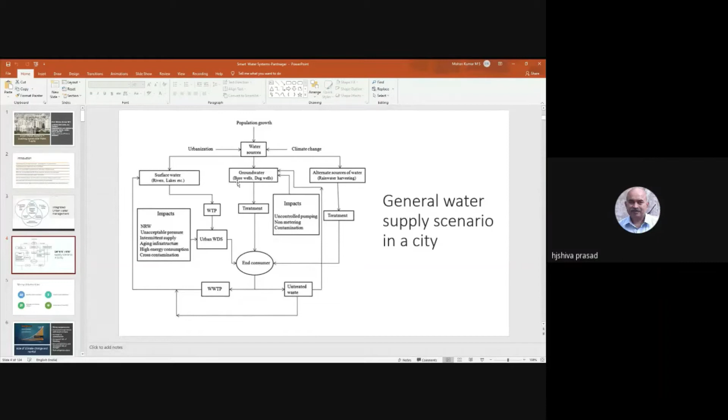So one of the main stresses on water resources, many people would have already talked about it, but I want to emphasize it: urbanization and climate change. We call it a double-edged sword, which is going to hit many of our cities, and all the more the challenges in terms of water resources for the city. These are all general things which we know, but making it happen is the most challenging. You have surface water, you have groundwater, then you have alternate water sources in terms of recycled water, treated water coming into the picture.

Obviously any surface water you need to treat and use. And of course groundwater, we were all taught in the old school of thought that you can just pump it and use it. All that doesn't fit now. You need to treat even groundwater, because in many places it's contaminated, from TDS to even bacteriological contamination. You need to really treat it and send it to end consumers. Other things are how you reduce the NRW, how you reduce the intermittent supply hours, how you address the aging infrastructure. This gives you a snapshot of what really happens to water supply in a city.

So basically we call it messy urbanization in our Indian context. Rural to urban migration is very large. Now we are hovering around 30 to 35 to 40% urbanization. It is expected to touch 50% in coming years. Imagine how we are going to handle it. Many of you are young engineers, researchers, scientists interested in water issues in all aspects.

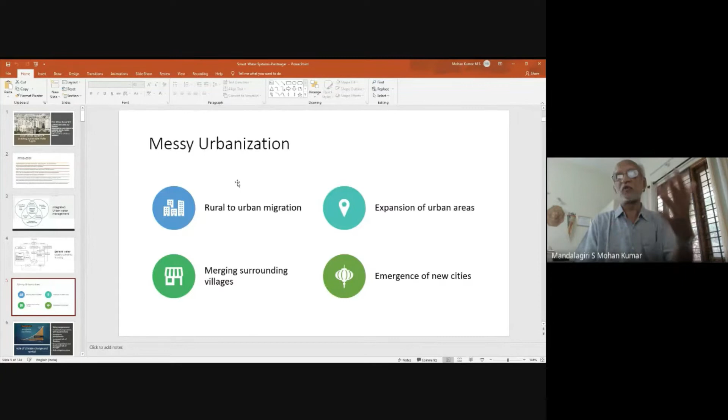Rural to urban migration becomes a very, very important thing. And of course, there is a very rapid expansion of urban areas. The planners, they draw it on the map. As a water resources engineer, your job is the most difficult one, to supply water in all aspects. And of course, one of the things is merging surrounding villages. These are all connected. And of course, there is emergence of new cities. It's an easy one to do. For example, it's always easy to plan a new city than to retrofit an old one.

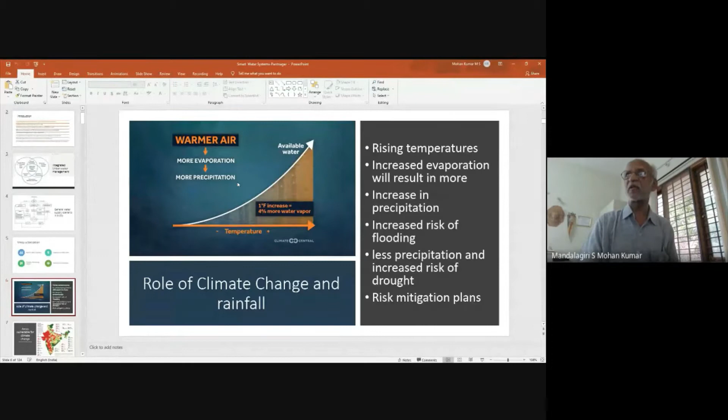I think many of my own colleagues and experts would have talked about it, but climate change plays a dominant role in all these things, and we need to really get ready. There's very, very clear evidence that the temperatures are rising. With the rise in temperature, automatically your storm bursts or rainfall bursts are increasing. You have heavy intensity rainfall in a short duration, which is going to come and go. And in such a scenario, how you are going to handle water systems is a very, very challenging one.

And of course, with that, it also brings in the contaminants as it moves along. It could be agricultural contaminants, it could be industrial contaminants, and all these things will end up in the rivers and the water bodies we are going to use for cities. Keeping that in mind, how are you going to take care of it is the question, and how a very good balance between surface water and groundwater needs to be maintained.

Whenever we talk about water security, now with remote sensing available, you have not only the current maps, even some of the old maps are available. Many river courses may be shrinking. Then the water availability may be reducing, or the other way around, water may be moving very fast, and unless you store it, it's already gone to the sea or wherever.

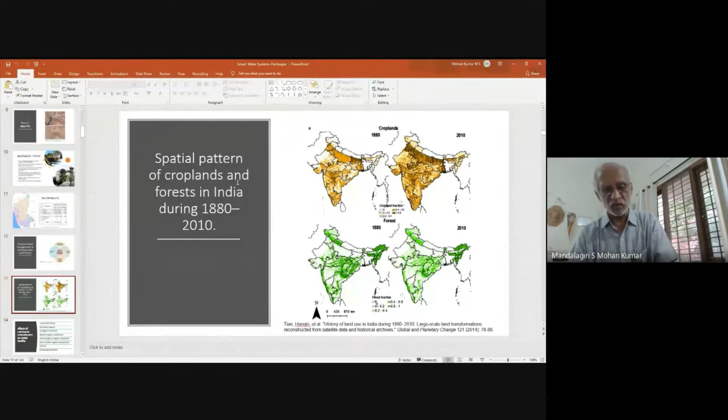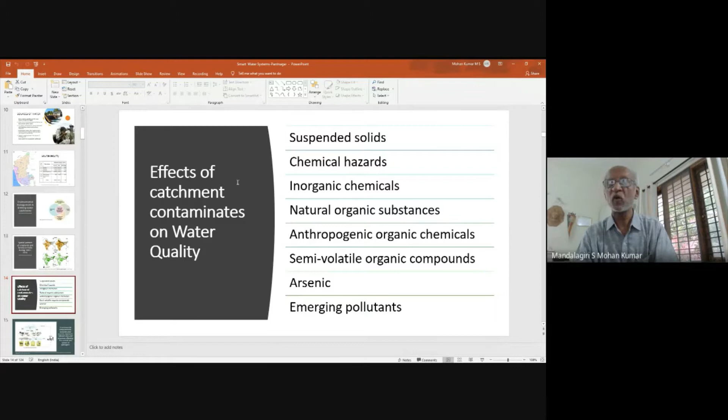You can see obviously land use, land cover, and land use pattern play a dominant role in our water system. It's changed completely, because you have to grow food for a very large population. At the same time, if you change a lot, it's going to affect your surface water and groundwater yields. So catchment contaminants affect water quality in terms of suspended solids, chemical hazards, inorganic chemicals, natural organic substances, anthropogenic organic chemicals, semi-volatile organic compounds, arsenic, emerging pollutants in terms of personal care products and PPC, microplastics, etc.

All these things indicate that continuous monitoring from catchment to consumer scale becomes very important for you to really manage water systems.

One should understand in terms of the hydrological cycle, the time of residence and movement of water, from 1 week to thousands of years depending on the component, whether it's surface water, river, swamp, or groundwater. One has to plan to understand what will happen to this water as it moves through, and how much time it takes.

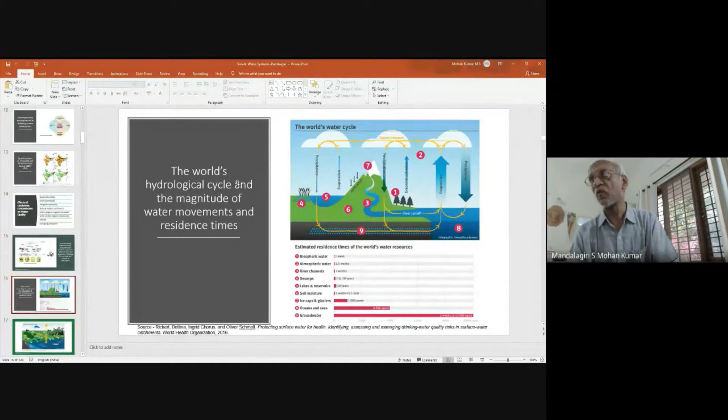In terms of quality, it is equally important as quantity. If you exhaust the groundwater in many places, it may take a very long time to recharge, so you should understand what you are going to do in terms of extraction of groundwater.

Unless proper accounting in terms of quantity and quality issues at every stage is taken care of, it becomes a very challenging task to control these pollutants as the water moves. So the catchment conditions and transport processes become dominant.

You're going to have retention, coagulation, degradation. A lot of these climatic changes are going to affect the quality. You really need to design the control and the efficiency to understand what has happened to all these contaminants - how you are going to control all these things becomes a very important aspect.

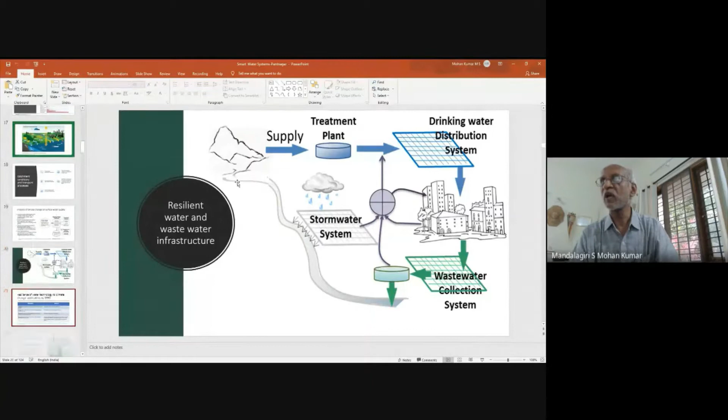If all these things are understood very well, designed very well, and made to run, you may have good control on the water system. So when we look at the resilience of water technology to climate change, there are a lot of studies conducted, with categories - category 1, category 2, category 3.

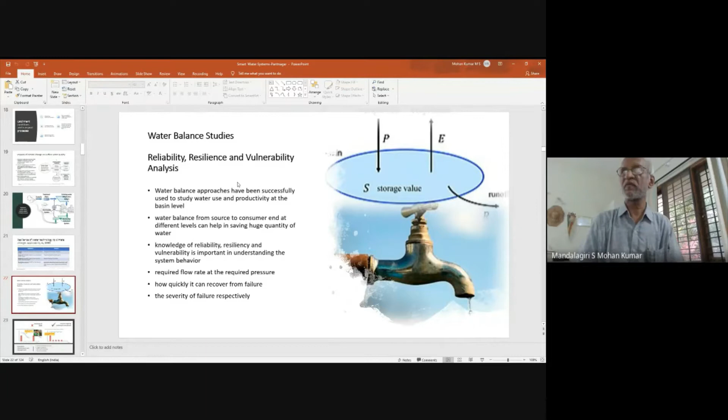When you try to look at water balance studies, whether at the sub-basin scale, basin scale, watershed scale, or more importantly even a city scale, you really need to understand what is going to happen in terms of water balance. So reliability, resilience, vulnerability become very important. Water balance in terms of precipitation, evaporation, storages, and runoff all become very important. You need to keep track of this to understand how to handle that system.

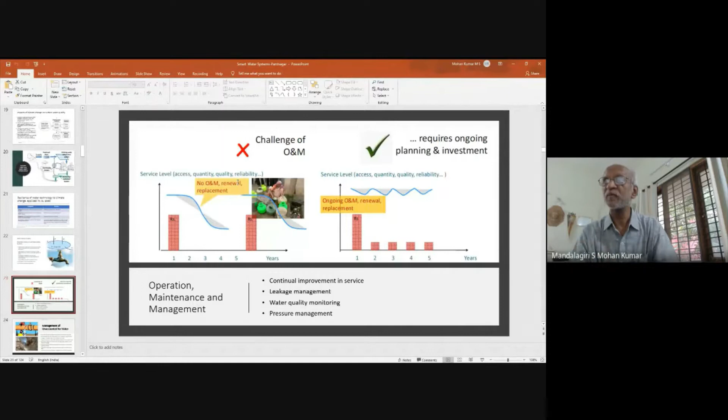This creates a lot of challenge in terms of operation and maintenance, requiring ongoing planning and investment. A very large level of investment is required in maintaining water systems, whether transporting raw water or treated water to the city and distributing it across the whole city. This requires continuous monitoring, and a lot of resources must be put into controlling continual improvement of service, leakage management, water quality monitoring, and pressure management. All this becomes very important.

So management of unaccounted-for water becomes very important. In fact, in many of our systems, losses are something like more than 40%. Imagine if you are able to bring down that 40% wastage of water - what we call non-revenue water, or NRW, or unaccounted-for water, UFW - to a healthy 20%, that's a huge quantity of water you are saving. It's almost like augmenting a new water supply, which could be used for other things. A lot of work is going on to make this happen, but it's easier said than done.

Equally important is that water is brought from very long distances and transported, and transporting water requires a lot of energy. So huge amounts of energy are used in moving water around, and if you can reduce this energy expenditure, you save not only energy but indirectly water itself, because a lot of water is required to generate this energy. This is what people call the water-energy nexus, and they link it up with water-energy-food nexus, and water-energy-food-environment nexus. We should understand that we need to spend as little energy as possible in moving water around, which is a very challenging task.

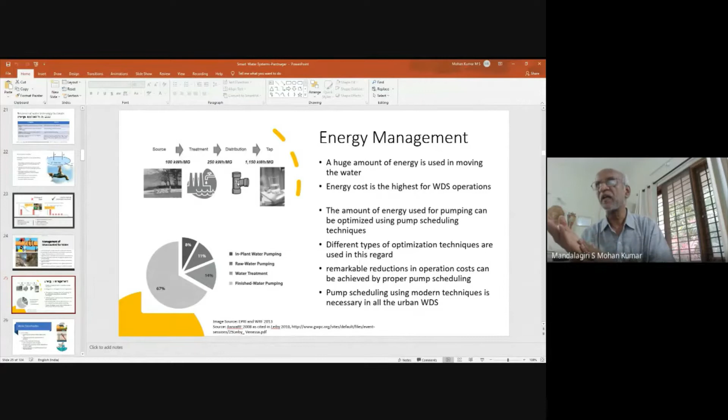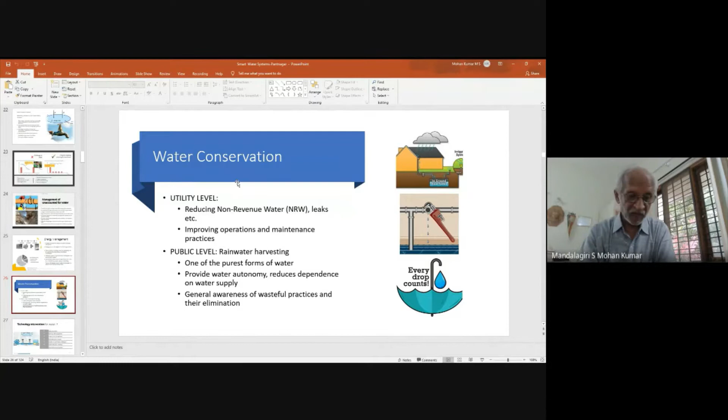One way to do this is water conservation at a utility level, reducing non-revenue water as I told you, and improving operation and maintenance - when you operate better, you save more. Rainwater harvesting also plays a dominant role, though it may look small. This could be rooftop rainwater harvesting, or catchment rainwater harvesting at a small scale. Whatever falls on the catchment, you try to harvest and store it in local ponds and other structures, which will definitely improve the groundwater situation.

So to do all these things, technology intervention for water is required - IoT for water or ICT for water, as people talk about it for water conservation for future generations. You can have a fully automated water system with real-time data acquisition, proper asset management to understand how assets are behaving, and early detection of events - an event could be a leakage or cross-contamination that can be detected. The system should be flexible to meet future challenges, such as when there's an increase in quantity you need to pump or other adjustments needed.

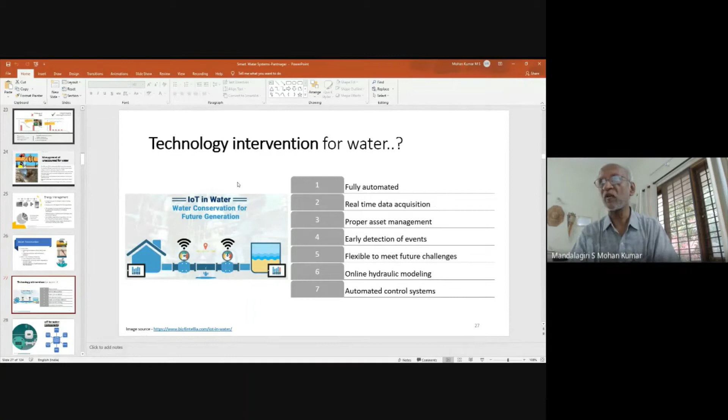There should be flexibility in the system or in the design itself. An online hydraulic modeling is required, along with quantity and quality modeling, and one can have an automated control system. It is not any fancy thing. Many campuses are already running this, and I will show you some examples. Many developed cities across the world are running in such a mode. We need to really look at what happens.

Shiv Prasad, am I audible? I think just tell me once in a while. Yeah, thank you. Yes, sir, you are audible. Thank you, you are audible.

All these things are required to build that model and then take it forward, which becomes very important in any system. Though we may talk about this for drinking water systems, imagine a flood control system — similar things can be done there too. My hydraulic model could be slightly different; I may be talking about an open channel model or something like that, and the levels I may be monitoring. All these things are being done and are required to understand.

When you try to look at monitoring and event detection, it could involve leakage assessment, quantifying the water loss, techniques for quantifying leaks, developing a leakage management strategy, leakage monitoring in zones and sectors, and pressure management. You can see the sketch. All these things are possible if you have a continuous data recording system and a good hydraulic model running, so that you're able to detect the event.

Based on the type of activity required, you need a special model to detect these things, not only in terms of data handling — it could be a prediction model or an analysis model. There are various ways of doing it.

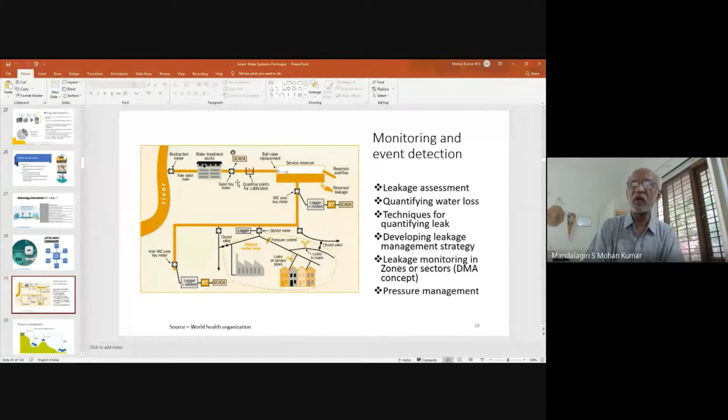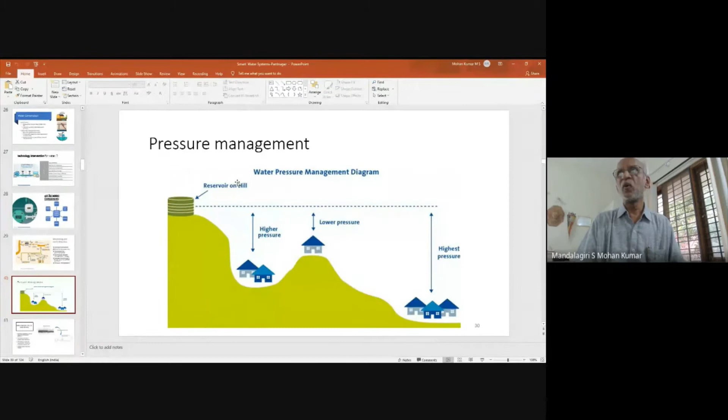There are devices and other ways of doing it also. We need to really look at how to control the pressure in all these aspects. For this, people are already gathering a lot of data analytics. By putting sensors, you can continuously monitor things and get data out at very large frequency — it could be in few minutes, few seconds, or few hours.

Whenever we talk about quality, we talk in terms of a few minutes. Whenever we talk about quantity, it could be slightly more time. But when you want to detect a leakage and other things, you require continuous monitoring of the data. When you see abrupt changes in this data, you can analyze it and think that something is wrong, and you can predict that some leakage is happening or something like that.

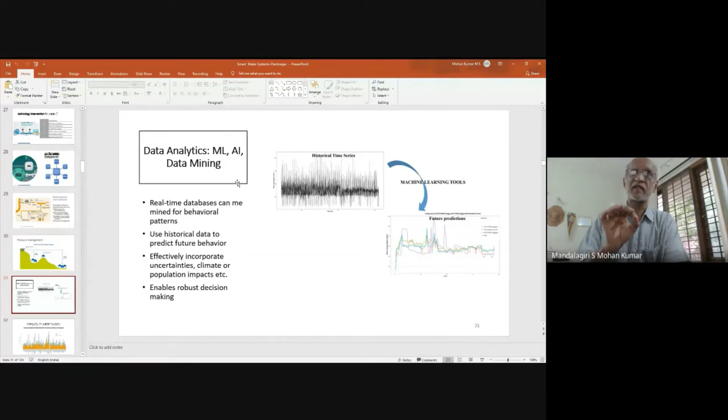Not only that, with all this data being collected, data analytics nowadays plays a dominant role — machine learning, artificial intelligence, data mining, deep learning, all these tools can be used to train your model. Using historical data, you can set things up. And the future, especially for young researchers, is in big data analytics. You need to really look at how to handle such a thing.

This happens due to various reasons, in terms of the hydraulics infrastructure, in terms of supply hours, in terms of various other things. Inequity will become a problem in many of the cities. To measure this inequity, I will only mention here, there are inequity indices, which have come from economics, Lorenz curve and things like that, Gini coefficient.

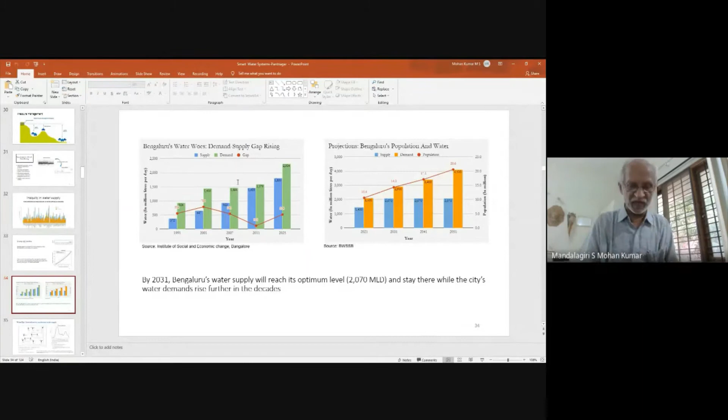So obviously, there is a plan for 2031 Bangalore's water supply. It will reach more than 2000 MLD. Currently, it's about 1500 MLD. When you look at the Bangalore water supply, there is a supply demand, then there is a very big gap, as you can see from the blue to green. And as the population increases, demand also increases. With all these things, how are you going to bring in equity as much as possible? Not only these, across the city also, a lot of inequity will come.

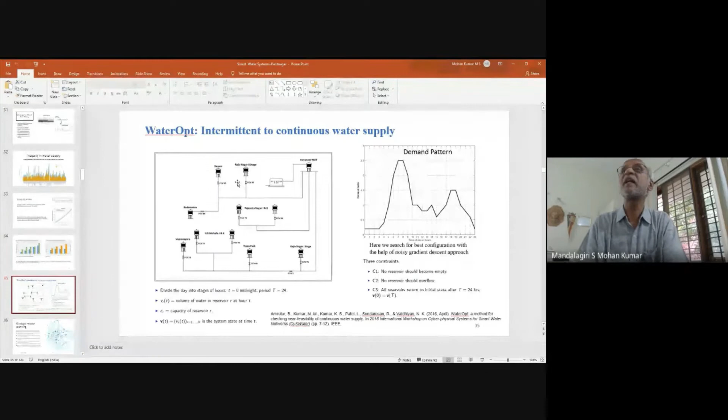And you can also ask, what are you going to do for big cities? It's not only for Bangalore, though I keep taking the example of Bangalore because I'm very closely involved with that. I'm sure many cities across India will be doing similar things. There is a strategic master plan developed for Bangalore, a project done by CH2M Hill. I thank them for sharing their slides with us. So the plan will be for another 30 years. How are you going to bring water?

Already we have Kaveri stage 1, 2, 3, 4, and stage 5 is going to come. Then recycled water is going to be brought in, some control on groundwater, and rainwater harvesting, and also various other sources. It could be from the western side of the state, or from the northern side of the state, like Linganamakki. So many things are being looked at.

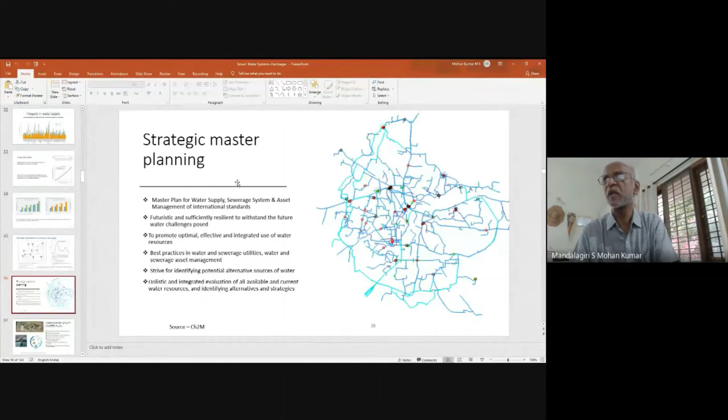And of course, one can ask, is Bangalore the only city in Karnataka? No, but we should also understand Bangalore puts in about 60% of the GDP of the whole state. So there is an obligation, obviously, to supply water. So wastewater utility is a key thing in a master plan.

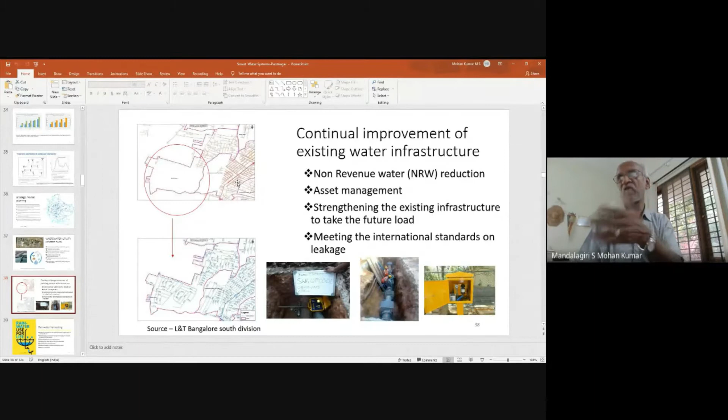Equally important is continual improvement of the existing infrastructure. As I mentioned to you, if you are able to reduce the NRW, it is as good as bringing new water into the system. This is a live system which we are a part of, in South Bangalore, where L&T has tried to reduce it from 40% to about 20-26%.

Rainwater harvesting becomes very, very important: capturing water where it falls, reducing pollution, then replenishing groundwater through recharging. If you collect it, the recharge will happen. I'll come to recharging as we go along. It's not as simple as it looks, but recharge will definitely happen.

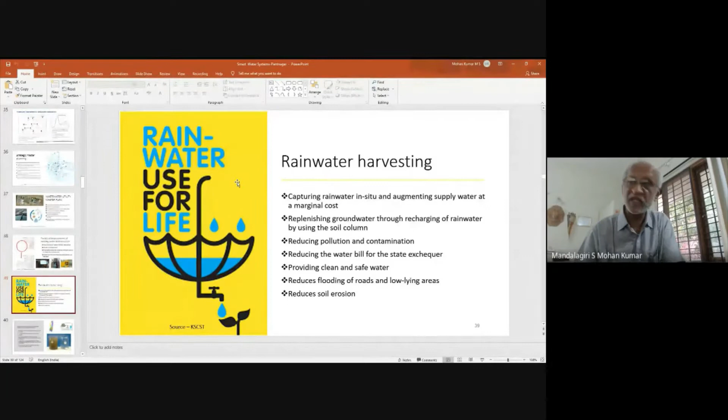And of course, when you try to catch the rainwater locally, you are going to reduce the water bill. We should understand that. So all these things will happen. Of course, it also reduces flooding. As you are able to catch the rainwater locally, you're not allowing it to move through the other areas.

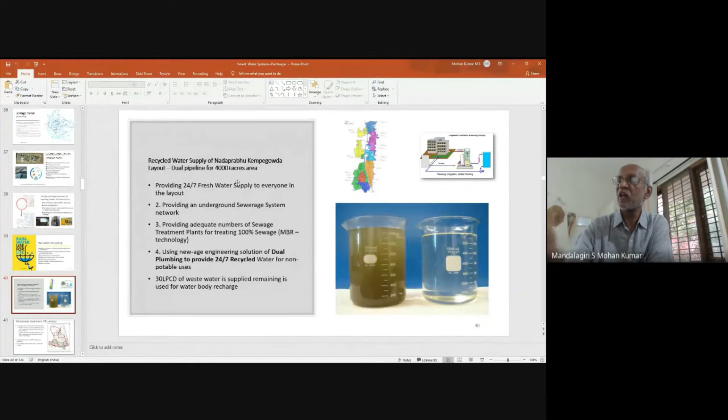And in any case, this is a photo of our own treatment plant, the IISc treatment plant, which I'm going to talk about. What you see is the raw sewage on the left side, and the tertiary treated water on the right side. It's a membrane technology plant, and they are planning to do it in the BDA layout. All these things indicate that continuous monitoring, hydraulic model, water quality model, data handling, all this automatically becomes a part of it.

So what you are seeing here is the IISc campus. In fact, we have a 2.5 MLD recycling plant based on membrane technology, tertiary treated water. Professor Mujumdar, Shekhar, myself, many of us were involved in making it happen. It is running, and we are supplying recycled water for all the irrigation and cooling purposes, definitely not drinking water. It's a variable speed drive, 24/7 on-demand supply. Any of you can come and see it running on the IISc campus.

So these things all indicate how you can bring down the stress on drinking water systems by doing all these things. Many of the campuses are doing it: IIT Madras, Infosys, of course Wipro. So the city water cycle becomes very, very important.

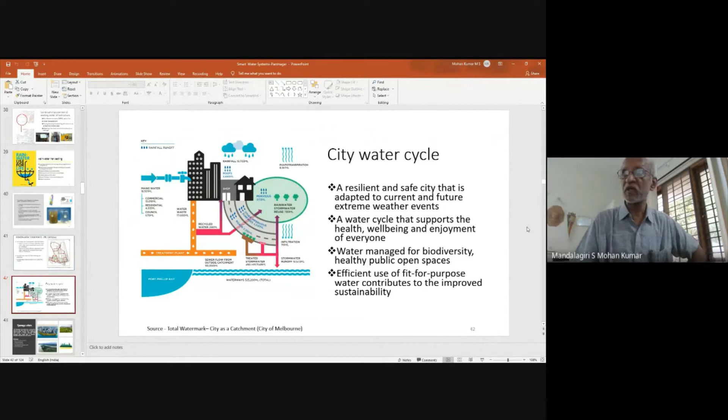And in fact, government is pushing all the cities to come out with their own plan for understanding their water system. Melbourne city has already done it, and Bangalore, Hyderabad, many cities are trying to do that. Similarly, you would have heard about sponge cities in China, trying to look at, when the water falls, how much recharge you can make happen so that you are able to get the water as it moves around.

And of course, we should also understand that waterlogging and flooding is a big challenge. We should also understand how to balance these things out. Many cities are looking at all these things. Of course, it's a slightly older slide, but we pump about 1,500 MLD of water to Bangalore right now.

We have another 775 MLD of water coming into Cauvery 5th stage. All these things I'm very, very closely involved in; that's why I'm sharing it with you. And to that, about 30% is groundwater we are pumping, something like 400 to 500 MLD of water. So roughly about 2,000 MLD of water is being pumped and utilized.

And of course, out of that, about 440 MLD of recycled water is being sent to Kolar, I'm going to talk about it, to do the groundwater recharge. And equally important, another 300 MLD is also already committed for minor irrigation to fill up tanks.

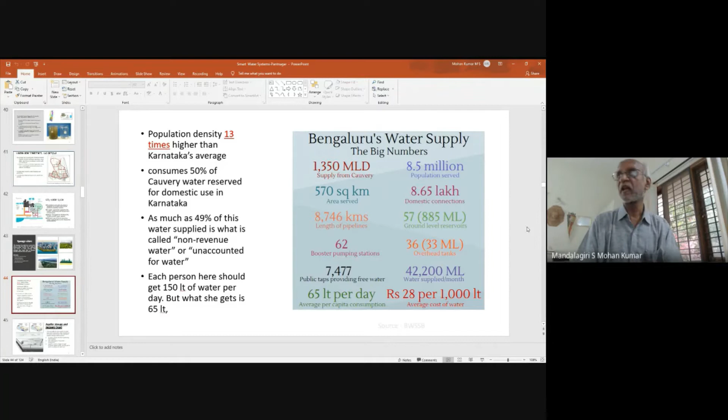And for storage and recovery, many of you would have heard, elsewhere many cities are trying to do it. In Texas they're trying to do it, and obviously even in Gulf countries, I have come across, they're trying to do some of these things. And in some of the nearby cities they're trying it out, not with full success. We need to really understand how much you can store, how much you can pump, what you can do.

In fact, in some small campuses we are trying it out in a limited way. We are doing some projects for BIAL Bangalore and the ASC Center. And one needs to really look at many of these new ways of handling water systems. So it's a very nice combination of hydrology, hydraulics, natural systems, to really look at how to manage water systems.

Obviously, the whole thing is about urban hydrology. Flood is one of the components of that. How you are going to harvest flood water becomes very, very important. It's obvious, if you can create storages, that's the way to do things. And then the footprint of the storages becomes very large. As long as you have the tanks and things like that, you can store.

Or even, for example, the out of the box solution: you need to create storages below parks or elsewhere, or even to some extent storages in basements, so that you can harvest, so that the flood effect is reduced. Then you allow it to pump and move on. This is what many cities and countries are doing. We need to really look at it.

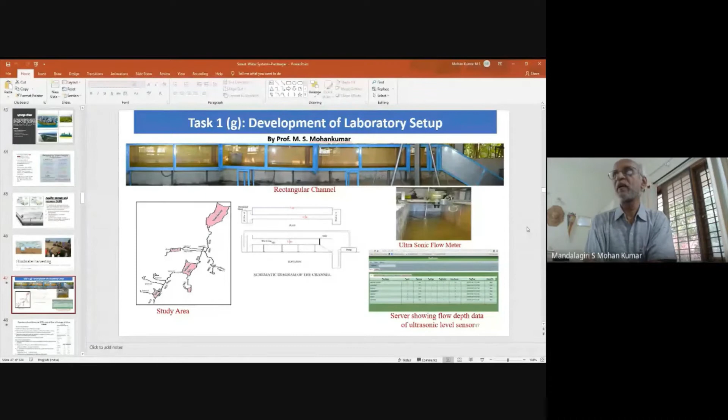In fact, it's very rare, where we are trying to look at harvesting floodwaters in a part of Bangalore city, and a stormwater drain has been modeled; a scaled model has been developed. It's a part of the ITRA project, which Professor Mujumdar and myself did. We have developed the scaled version of the model in the lab, trying to understand how blockages will affect the floodwater or stormwater movement. And of course, it's a fully instrumented one. We try to look at what can happen to that.

So a physical model is built. Many of you know how a hydraulic model is built, and the aspect ratios are different here in terms of the depth and the width. And we conducted a complete experimental program. We also developed a CFD model, because instead of doing the experiment in the field, which you cannot, a controlled experiment can be done in the lab to understand how the system behaves.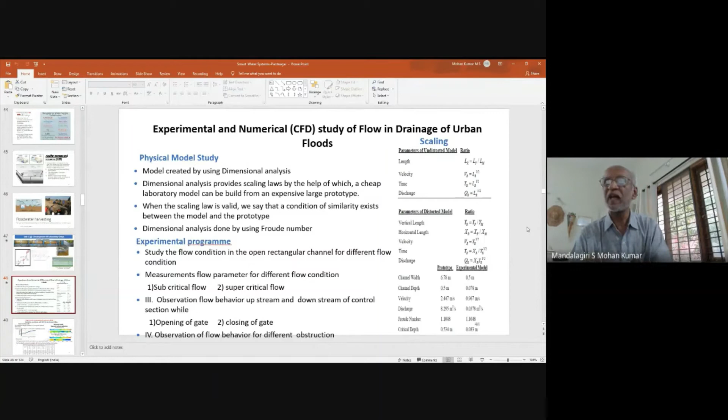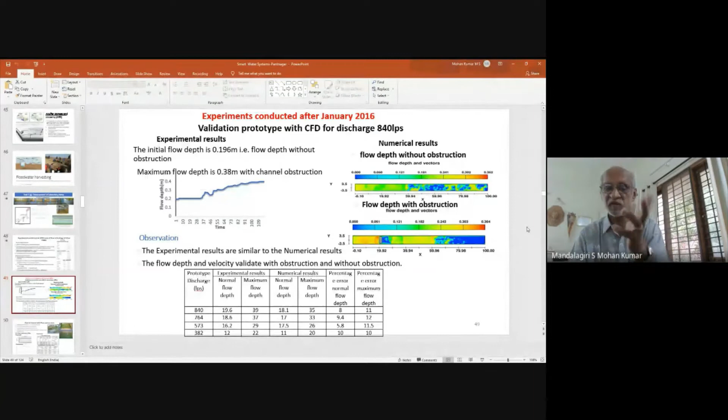So these are the experimental results. We developed a CFD model. We tried to send the scaled version of the flows, and we compared the experimental and numerical results. And ultimately, we compared what happened in the field vis-a-vis in the lab. We are able to generate the model. It's the first time a stormwater drain has been completely modeled and understood.

In fact, what you can see there are the blockages which we could create in the lab to understand how these systems behave. All these things can be done to understand and to build these things in a better way.

One of the very important projects, which I'm a little upbeat about, is transferring the secondary treated water from Bangalore, KC Valley, to Kolar to fill 138 tanks.

In fact, 126 was the initial design. Now about 138 tanks are being filled in Kolar. The secondary treated water, not tertiary treated, is used to fill them through pumping as well as gravity. All the dotted lines indicate gravity flows. All the full red lines indicate the pumping system. It is done at several places to fill a very large number of tanks.

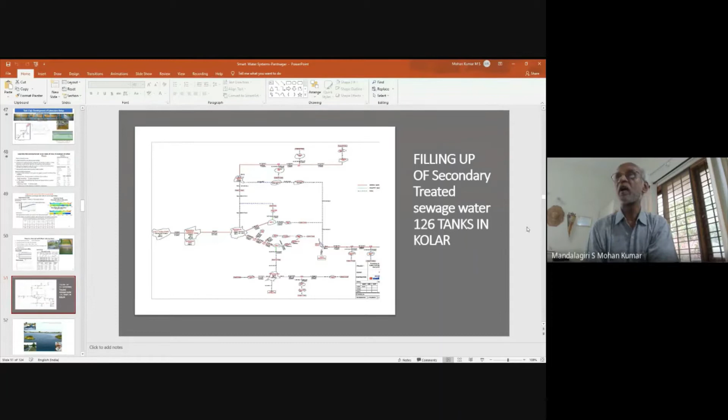I'm going to share with you a few photographs of how these systems are running. It has definitely improved groundwater recharge a lot, and that is already happening. These are all the tanks. This is one of the first points, the Lakshmi Sagara Kere, as we call it. Kere in Kannada means tank. As you can see here, this has been created, and as you move, we have many tanks which have been filled up.

Obviously, as you expect, this is going to do the local recharge of the groundwater system. And not only water for human consumption, it has completely changed the environment and ecology of all these areas, as you can see here, in terms of the lotus and other things. And I'm very happy to show you, I think some birds must also be there, yeah, which are all coming. So a lot can be done by transferring such water. People are trying to do a similar thing in the Vrishabhavathi Valley.

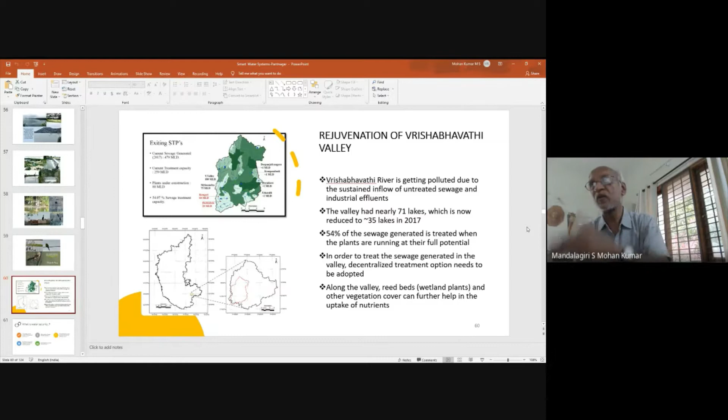Of course, I'm giving you some examples only about Bangalore and surrounding areas. With these things, I call it Bangalore no longer a sink. It is a source for the neighboring areas also. And I'm sure many cities across India are already doing or planning to do such activities. And of course, you really require water security. That means when you want the water, it should be available, how you want it, in the quantity of water required.

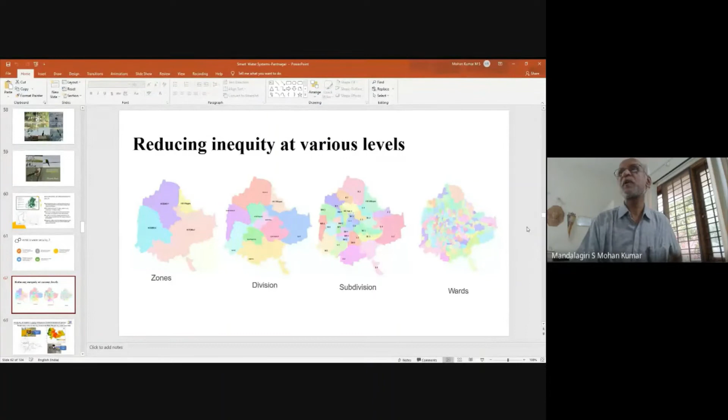Coming back to Bangalore itself, you have zones, divisions, subdivisions, wards. A ward is a municipal area. At every level, the inequity persists. So if you want to bring equity, is it at the zone level, division level, subdivision level, or ward level? How do you bring in as much equity as possible is the question. To do that, you need a very large number of controls.

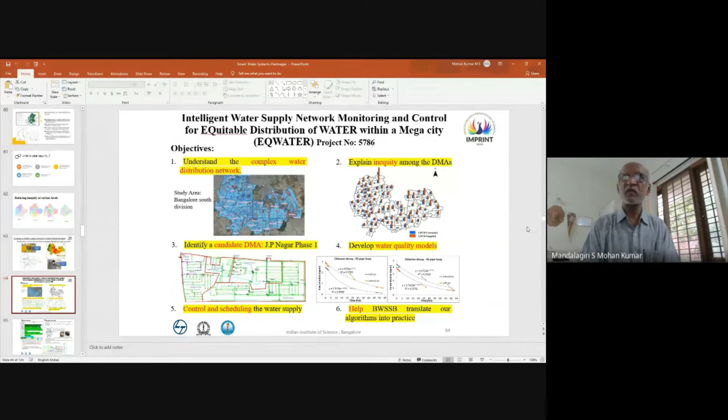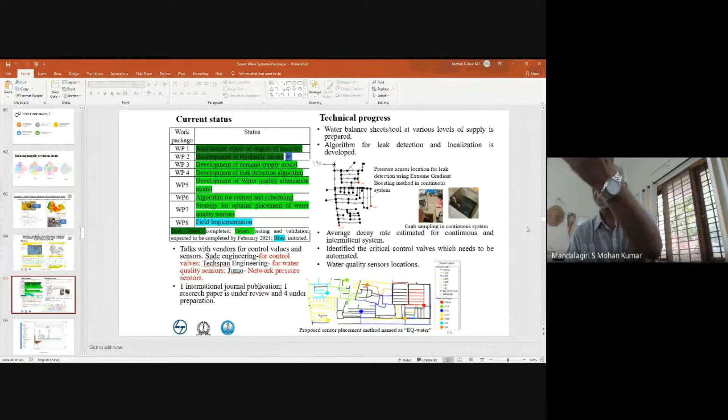As you can see, not only IISc, but BWSSB, L&T and many others are partners here. To help BWSSB translate our algorithms into practice, many work packages are already developed. We are almost at field implementation, looking at the water balance at various levels, developing algorithms for leak detection and localization, estimating the average decay rate for continuous and intermittent supply, and identifying critical control valves for water supply. All these are being developed and will possibly be implemented with BWSSB's help.

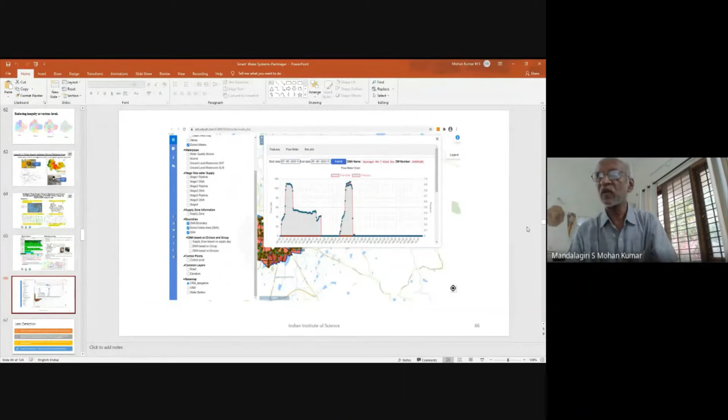So this is the type of continuous monitoring. The data will come in real time. I'm only showing a snapshot of it, the supply and other things at various times. The more data you analyze, the more you can come out with your own conclusions and what can be done. And there is a lot of leak detection that can be done through experimental automation, which will run at required times for flow and no-flow conditions. The same model can be used to introduce periodic fluctuations. And all conditions need to be the same when running the experiment.

I'll show you, we have a small experimental setup in the lab where a controlled experiment for leak detection can be done. And all these things are possible when you have a controlled system. In fact, this is the system. It's a LabVIEW, but we have a real system where we have the different pipelines, materials.

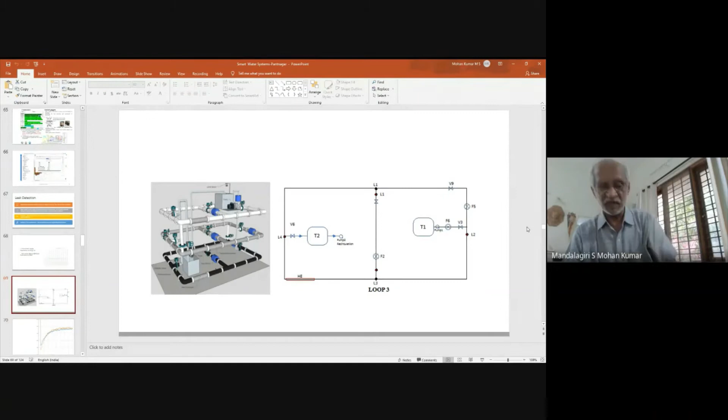We can control any pipeline we want. We can create a leakage where we want. Leakage is nothing but a data point. And continuous monitoring and time series data can be utilized to predict the leakage model. That's what we are trying to do here.

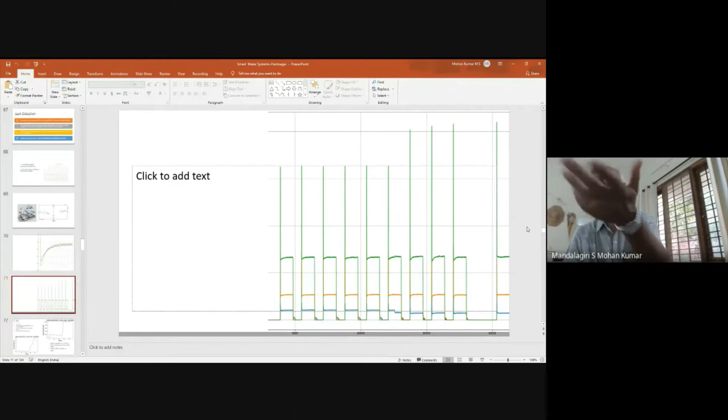I'm going to move faster because I have so many other things to talk about. So any abrupt changes will tell you something is not okay, and then you really need to look at the leak detection. This is one of them, and we have obviously developed some log likelihood models and things like that where you can predict the leakages.

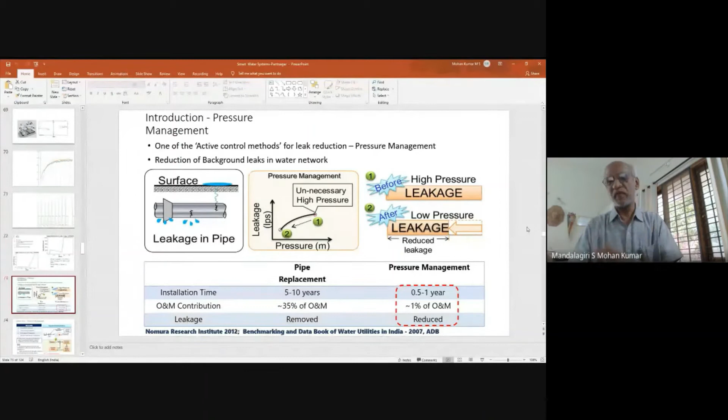The same leakages also can be controlled through a pressure management system. So there are background leakages that can be created, and because of the pressure control, higher pressure will involve more leakages, and the DMA is different from the pressure management, pressure control areas.

And not only did we develop the model, we applied it on a small network in Coorg area with real-time data to control the leakages. As you can see, the network details are given here, measurement devices, flow meter at the inlet, pressure sensors. So NRW was 24%. With the control of these valve devices, we were able to reduce the leakages, as you can see here.

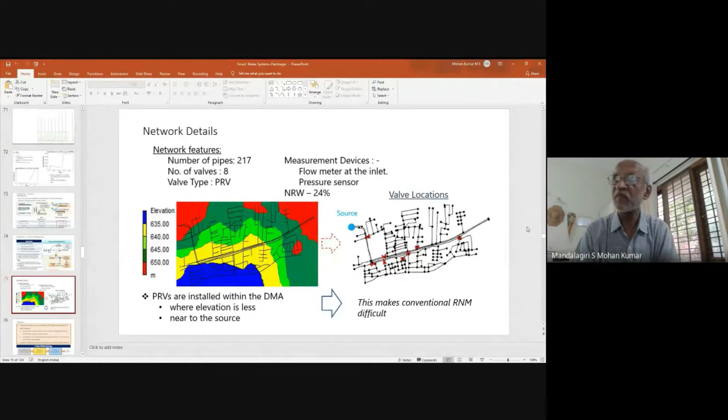So basically, the whole thing is about how to control the pressures in water networks with multiple internal PRVs for NRW reduction, sectorization of water networks into pressure management areas. These pressure management areas are different from the DMAs because one valve will control different areas. So how do you optimize it? How do you control? How do you bring down the leakages is what we are trying to ask.

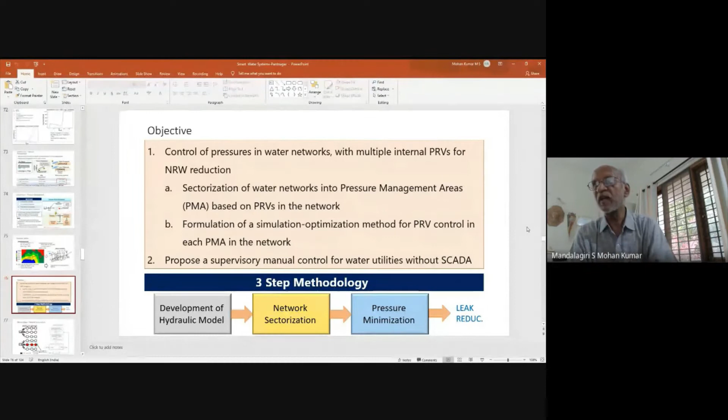Obviously, all these things are control based. So development of the hydraulic model, network sectorization, pressure minimization, and leakage reduction. Using simple tree networks, which valve will affect which area. We have the optimization model. We did this with Hitachi. One of my students, Anjana Rajkumar, she's working there in Hitachi. In fact, it's in Urban Water Journal. This paper is available; any of you can see it.

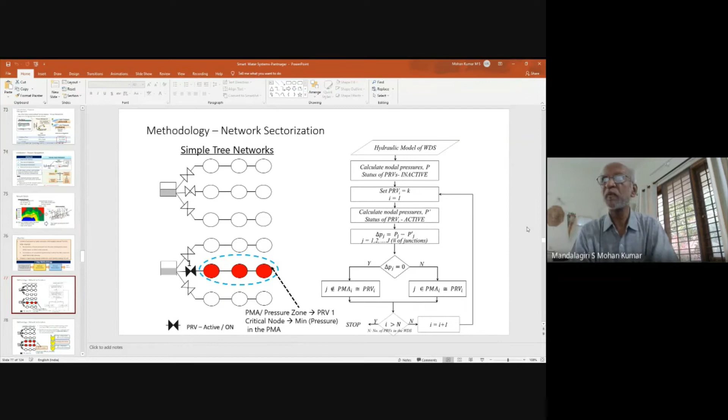So we optimize, and I'm going to move faster just to show the reduction in the leakage. So ultimately, before the control, we had 24% NRW. With multiple PRVs, we brought it down to 18%. With only a single PRV, we could bring it down to 22%. And of course, you can see here what it works out to in terms of money.

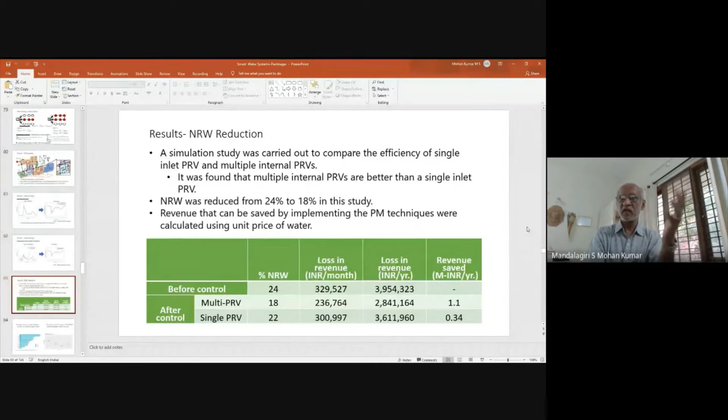So the whole thing indicates to you, though it's a very small area, it is possible to control leakages through PRVs. And all these things are control valves, and in smart water systems, you need to really analyze them to bring down the leakages.

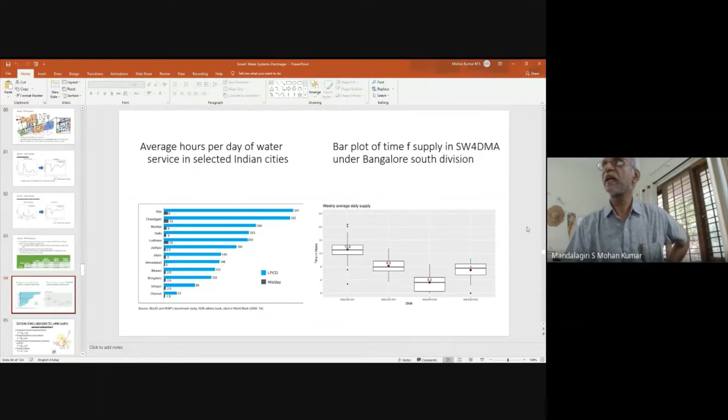So when you look at the supply to the city, comparing different cities across India, we are on average around 100 to 120 LPCD of supply. And the bar plot of supply indicates how many hours we supply in different places. Keeping these things in mind, we are trying to look at the complex theory approach for water quality sensor placement.

Munvalli is going to talk about water quality a lot, including where all you can place the sensors and how you get the signal. For that, we are actually using an algorithm developed through complex network theory.

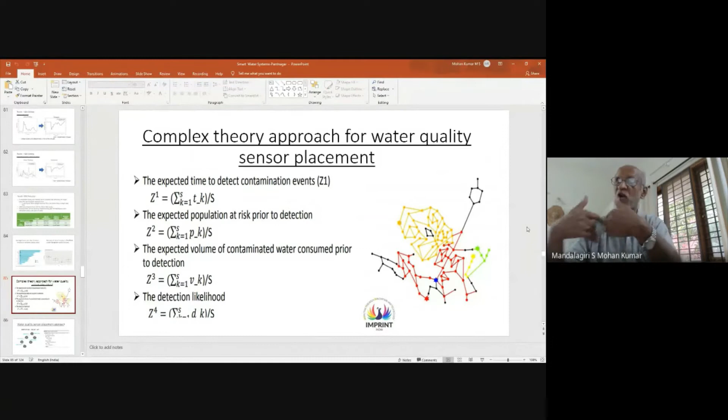There are various measures for handling this: expected time to detect the contamination, Z1; expected population at risk prior to detection, Z2; expected volume of contaminated water consumed prior to detection, meaning it's already gone, Z3; and detection likelihood, Z4. Using all these statistics, we tried to develop this.

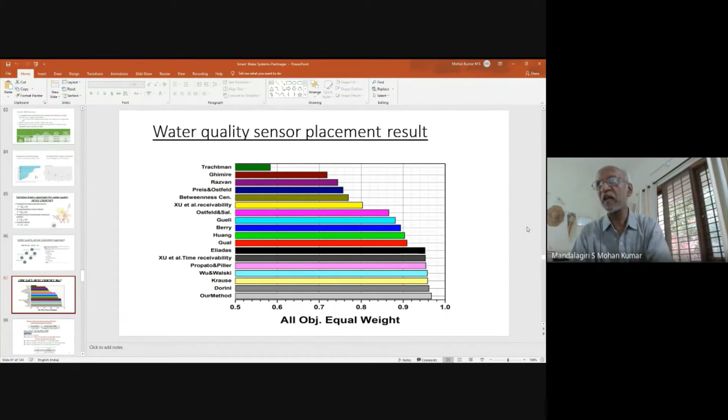We tried to develop a model using complex network theory, and we are able to show that our method performs at the bottom, meaning we are able to detect quite a bit in terms of water quality sensor placement. These events we created in the mathematical model, and we also operated on whatever data we collected in the field to really look at what can be done.

So regarding water quality state, we need to really look at how to measure the water quality state as well as the parameter estimation under a dynamic system, how things are changing. There are different Kalman filter based techniques which we have developed, and I'm only sharing a few with you.

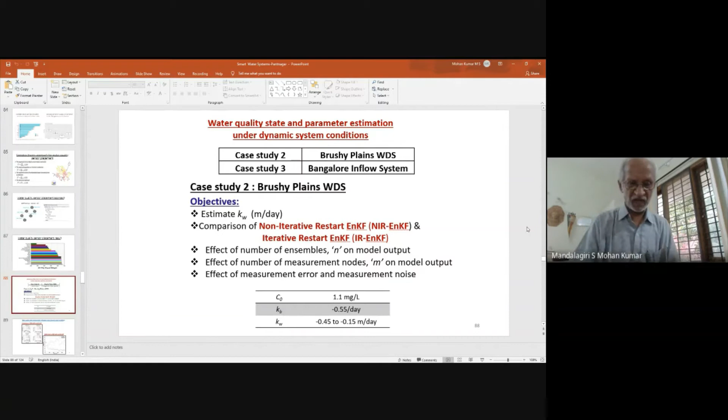What is interesting is that not only the state, but the parameter estimation also can be done using Kalman filter. This is again something we have done along with Anjana. This is in ASCE, I suppose.

What I want to show you is that it's possible, when you have all this data coming into the picture, to develop robust mathematical models to predict what's going to happen. There are various mathematical tools available that you can use to build models.

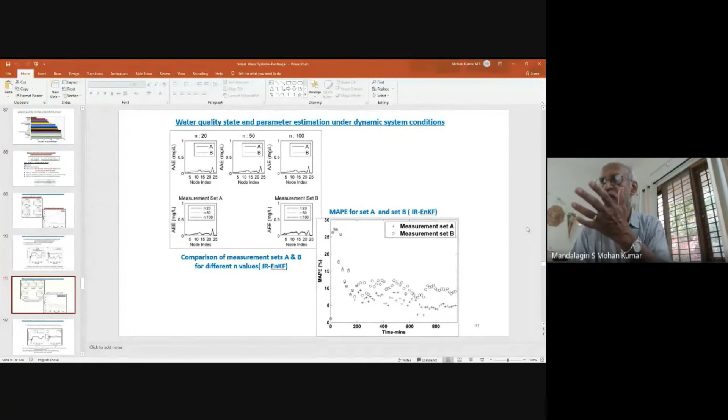There are different ensemble Kalman filter techniques. I'm not going to get into those details, but I'm only trying to indicate the possibility of developing such strong models where you will be able to predict what will happen to water quality in the pipe network, both in terms of the state, meaning the water quality attenuation that has taken place, and parameters, whether the overall bulk parameter or the wall parameter, and how these can be estimated.

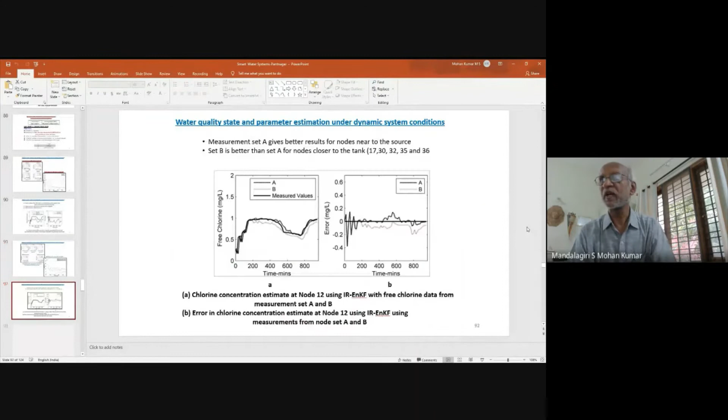I'll just flip through that. Now, coming back to our own imprint model, we are trying to develop the water quality attenuation model by picking up data in the field, along with real-time data, trying to understand how the systems behave overall, and whether we can fit an overall water quality model to this and understand what is happening to the system.

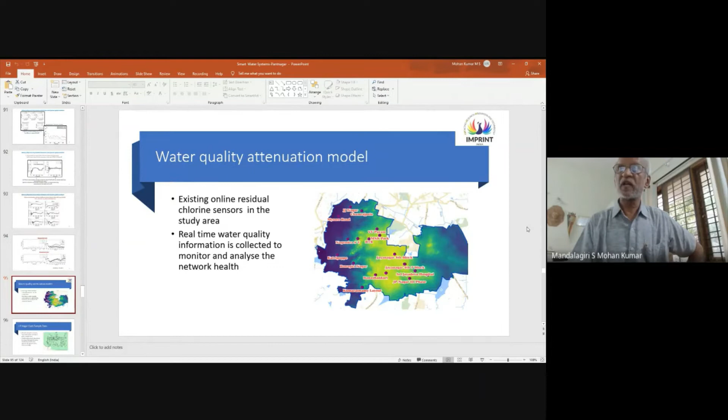As I mentioned, the hydraulic model and water quality model, all that we are trying to do for this imprint area, using the existing online residual chlorine sensors in the study area. Real-time water quality information is collected to monitor and analyze the water network health of the system.

As you can see, a very large number of grab sample data has been picked up, and all these plotted sample locations come from 39 months worth of grab sample data. Usable data points were identified by going through the data month by month, quarter by quarter. Obviously a lot of data cleaning is required to understand what's happening.

We came out with different categories of data in terms of continuous system, intermittent system, whether it's monthly, quarterly, semi-annual data, and then 2-point data systems or 3-or-more point data systems. Obviously you need to really segregate and understand how the systems behave. These are the things we can really look at.

So the attenuation value depends on the different types of data sets, and we got different attenuation values for them. Comparing with the literature, we also concluded that some of these data attenuation rates are acceptable, and some are not acceptable. We need to really look at, as listed there, the average time being an acceptable measure.

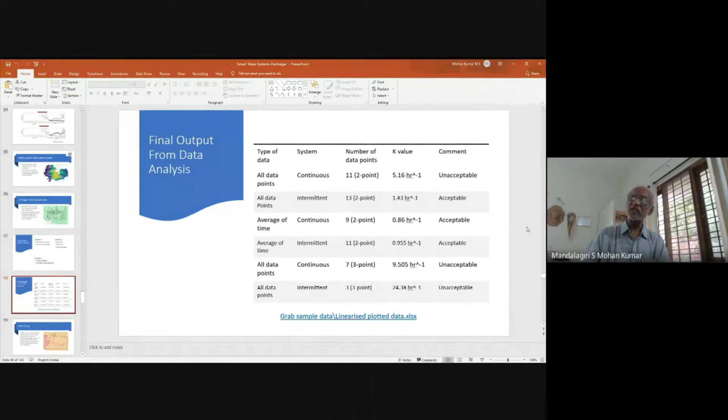All data points for the intermittent case are acceptable. The intermittent average time is also acceptable. Based on these things, we have built a water quality model. Once you know the attenuation rate, you can build the water quality model for that area and understand a simple thing, for example for a single component, how the chlorine will attenuate given your input system at the source, wherever it is coming in, and how much chlorine is eaten away in your pipelines.

The basic thing will be to obtain field chlorine measurements to accurately calibrate and study the area for a drinking water pipe system, and the decay rate considering the impact of pipe material, pipe velocity, pipe diameter, and flow conditions. We have made a very detailed study.

This paper, Rucha and Sheetal Kumar have taken the lead, along with Dr. Rao, my colleague. We are possibly going to try submitting it to the journal Water Research.

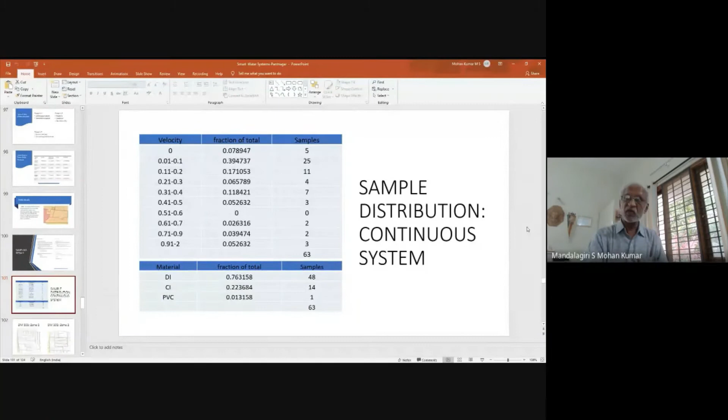We are trying to compare what will happen. We have sampling details in the continuous system and intermittent system. Not only sampling, we have built models for both continuous and intermittent systems, and how the system will perform in terms of water quality.

A complete evaluation has been done. Models have been built, grab samples have been collected, and overall chlorine attenuation rates have been calculated. All these results have been put together to possibly come out with a paper in Water Research, which is a tough journal, we don't know.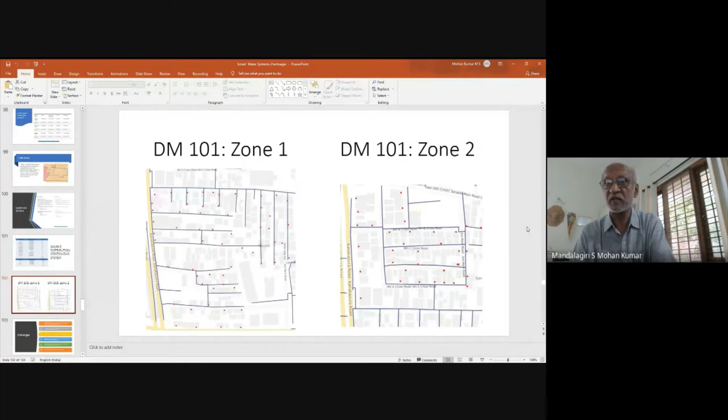So when you look at the overall challenges, just recapitulating ourselves: obviously higher temperature and more extreme, less predictable weather conditions will affect distribution of rainfall, river flows, and groundwater, and of course it will deteriorate water quality.

Low-income groups living in critical parts of urban areas are vulnerable to threats of water supply. This is the most important thing one should note. Variation in water availability will impact health and food security.

Migration of rural population to urban centers has resulted in towns and cities expanding rapidly. As I mentioned, more than 40% urbanization is happening, and it's expected to reach 50% in the coming years. It's a huge challenging task.

Distribution of rationed water to communities is a challenge due to hydraulic inequities favoring fewer areas. Hydraulic infrastructure, which is limiting, automatically brings in a lot of inequity. How are you going to share the excesses to the shortages? Is it easily possible to transfer water?

To do that, you should know exactly what is happening, and you need more controls to make it happen, to bring it more towards equity. Overloading of treatment plant facilities is also a real concern when you look at all these things.

Is it possible to build in some adaptive capacity at the city scale in the context of urban water supply? How do you build this adaptive condition? Building leadership and action on climate change adaptation, defining adaptation priorities, implementing adaptation processes - awareness to climate change and access to climate change information will all be important.

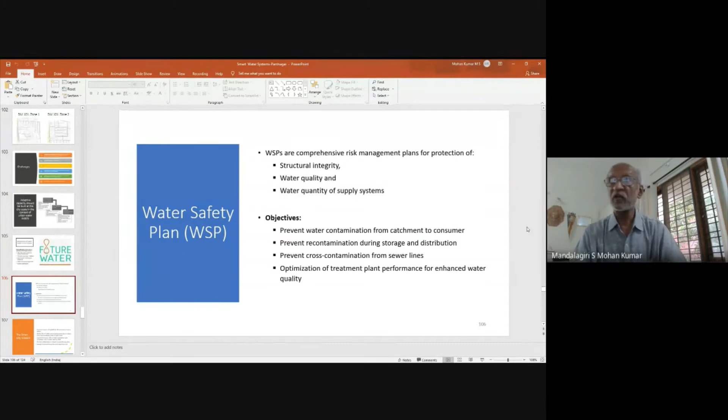Optimization of treatment plant performance and enhancing water quality. And of course, into this you can add continuous monitoring from catchment to consumer at various stages, in terms of monitoring devices, sensors, actuators, controllers. All this becomes very, very important. That only will try to give us some understanding of what is happening.

When you try to look at this in terms of the smart city mission, which are all connected - obviously cities are the engines of growth for the economy of every nation. Nearly 31% of India's current population lives in urban areas, contributing 63% of India's GDP. I'm not saying we should move from agriculture to industrial generation, but at the same time we should recognize that cities will play a dominant role. It's already playing that role, and in the coming years it will play an even more dominant role.

Basic philosophy is to adopt a comprehensive plan, and sewage treatment being the most important one when one needs to really look at recycling and reuse of water, which becomes extremely important.

Coming back to our own urban flood, I think my colleagues Professor Mujumdar and Shubha would have talked a lot about urban flood, so I'm not going to talk about it. What I'm going to talk about is harvesting rainwater, the urban flood water, and understanding its linkages with the local groundwater system.

To this effect, we are trying to test and implement rainwater harvesting units to harvest and reuse flood water. When you look at it, it's observed that more than 119 square kilometers of area, based on the BDA LULC mapping, is available for rainwater harvesting. Based on historical rainfall data, we can harvest about 18% of the city's water demand, so local harvesting is possible.

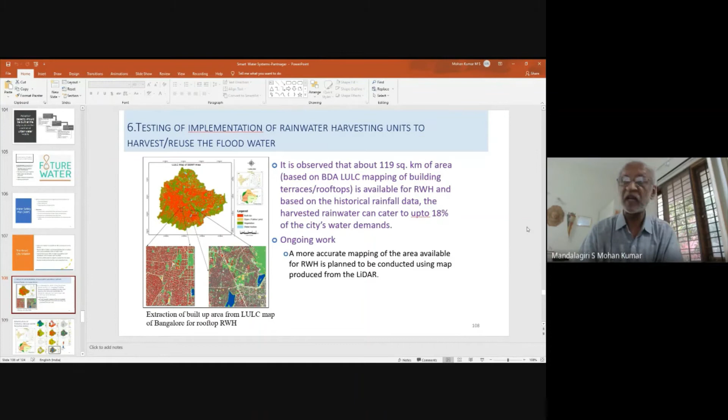A more accurate mapping of the area for rainwater harvesting is planned. Of course, we are planning for LIDAR, but it's taking quite some time. We also have the NRSA data, and we have analyzed it to understand how the footprint will be.

One of the key things which we did - in fact, one of my students, Dhanraj, along with Kaushika, has done identification of potential groundwater recharge zones in the Bangalore area. For this, various layers of information of the groundwater system have been analyzed in terms of geology, soil maps, land use pattern, and geomorphology.

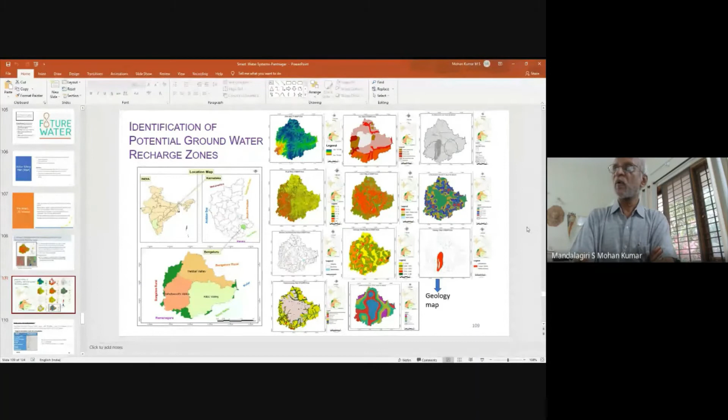Many of these data, as you can see on the right hand side, have been analyzed in layers of information to come out with the possible recharge areas. For this, we have used the analytical hierarchy process along with the weighted linear combination technique, which was applied to identify the groundwater potential zones for recharge.

Depending on the criteria - geomorphology, geology, lineament density, LULC, soil, drainage density, slope, and rainfall - different weights were given, and we have come out with the types of potential recharge zones, the possible recharge zones.

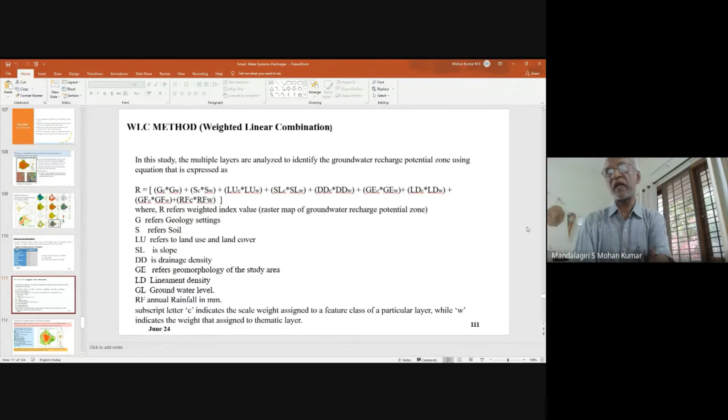This is the type of the system which is used here, the weighted linear combination method, using the analytical hierarchical process in terms of the weighted index. As I mentioned to you, all the different areas are considered, and then the output will be in terms of the recharge areas. This is the output. The potential groundwater recharge zones have been calculated.

As you can see here, the central portion of Bangalore is showing the red portion where it is less prone for recharge, whereas the outer zones are good for recharge, which is also expected because the core city of Bangalore and the central portion is more of hard rock areas, where the weathered portion is also smaller. As you move away, the city drains into three different valleys: Hebbal Valley in the north, KC Valley in the east, and Vrishabhavathi Valley in the south. These are a little more amenable for groundwater recharge. And this has come out with that.

And the whole idea of showing this is the interaction between surface water, where you are storing tanks, or the rainfall water that falls: how much you can store and how much is possible in the natural process can be calculated using tools like this. Anywhere from 3 to 8% recharge is possible in terms of the recharge areas. That's what it shows, unless we force it. People talk about creating shafts and other things and trying to send the water.

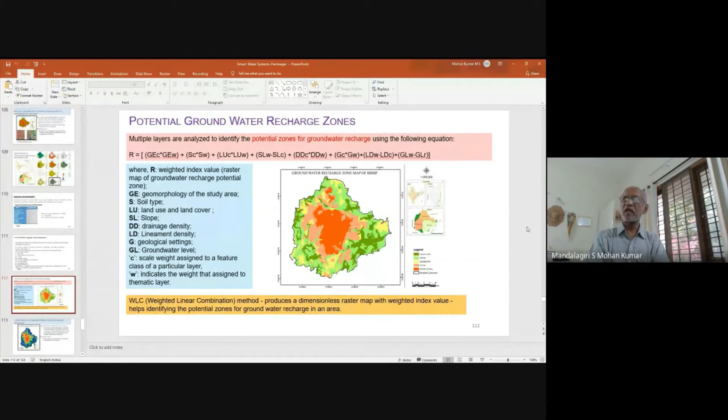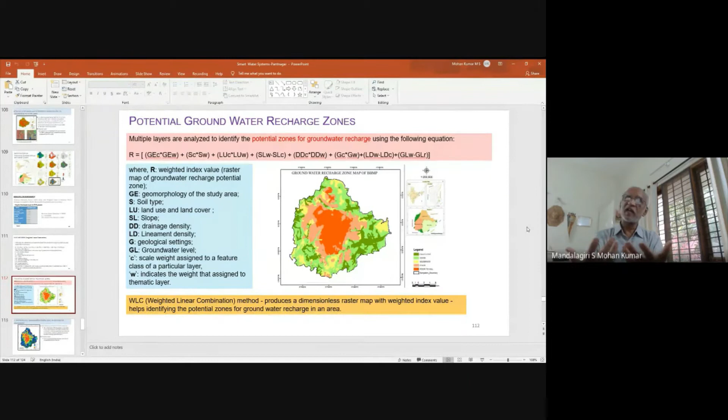Please, one should understand that especially in our system, where storm water and sewage mixing can happen, or the land use can contribute to a lot of changes in the water quality, we should not contaminate the deeper groundwater by sending water without treatment. If we want to send water through proper shafts to the deeper aquifers, it has to be treated to drinking water standards or even more than that. So the need is there. When you treat it to such a high level, possibly there will be a need to utilize such water. It's a balance on which one really has to take a call.

So these are the inferences drawn in terms of identification of groundwater potential recharge zones. As I mentioned to you, the central portion of Bangalore is classified as a poor groundwater recharge potential zone, whereas the outer regions are much better groundwater recharge areas which can be thought about.

Another thing we are also trying out is the testing of porous pavement technology. In fact, Kaushika, Dhanraj and Vanishri are trying to do that. As I mentioned, it is a part of our urban water project, which Professor Mujumdar is leading, and Shubha is also a part from KSNDMC. We are trying to develop a porous concrete and see how much water can be stored locally and then allowed to slowly seep into the groundwater system.

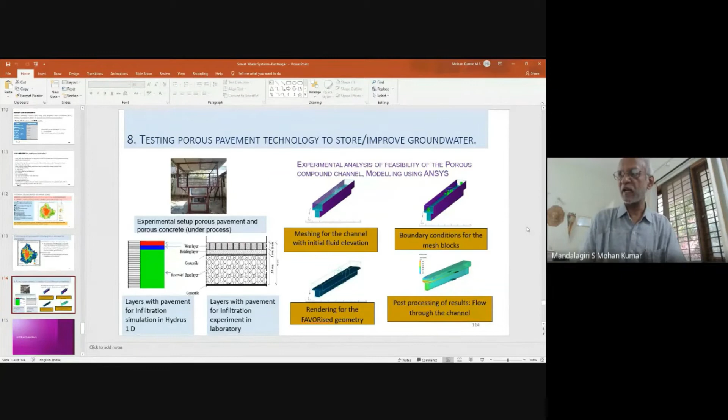In the experimental setup, Kaushika and other group members are going to conduct those tests. And we have also developed a CFD model for a porous compound channel itself, to see how much recharge can happen. Please understand that if the water table is high, all these things will not work, because there is nothing to recharge. If the water table is a little low, it is possible to recharge.

A few more things I want to share with you. I'm a part of developing the IUWRM guidelines, Integrated Urban Water Resources Management Guidelines, for the Ministry of Housing and Urban Affairs. It's going to be circulated and shortly come out, possibly as a manual, along with Jacobs Engineering, Mr. Gaurav Bhatt. So the whole idea here is to look at how to develop these guidelines and come out with the activities. One of the outlays will be the background: why an IWRM approach is needed.

How do you do the design? What are the principal important points which need to be addressed? All these things we are trying to address in this IUWRM approach. Approach and methodology is given. Water demand estimates, that becomes the most important thing. Demand estimates, managing demand and supply, developing city water balance, institutional considerations.

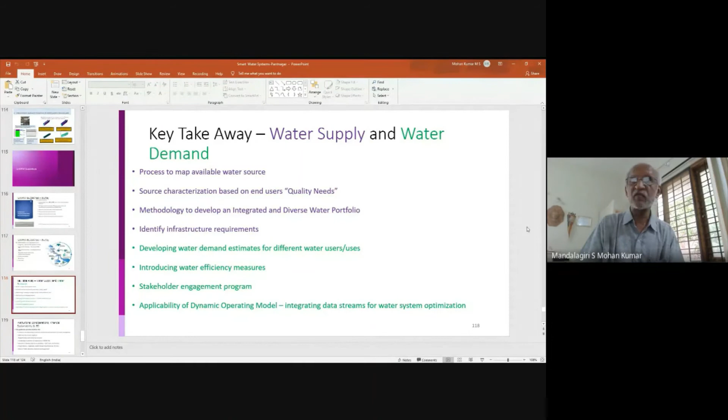Of course, I'm going to show you only 4-5 slides. It's a huge document which has been presented to MOHUA. So there are the institutional considerations, financial sustainability and IEC. Creation of an overarching framework of institutional mechanism for water management, need and role for a water regulator. In fact, we don't have a water regulator like the energy regulator.

Required policy and monitoring measures, coordination mechanism to implement the IUWRM plan, measures to develop financial sustainability, tariff, taxes, transfers, project delivery, applicable models, market-based financing, PPP, so bringing in private players, which is happening in a very limited way, but not much. And means of public education, outreach, engagement, all these things really need to be looked at.

So this is the plan to practice when you look at national and international good practices we have talked about in IUWRM. As I mentioned to you, the good examples are Singapore. We always talk about it. And of course, our own: Chennai has done a lot of rainwater harvesting. Bangalore applied not only rainwater harvesting, they have done a lot of things on monitoring and dashboarding, bringing in sensors and devices, so many.

And of course, as I mentioned to you, the recycled water usage, not only for the city itself but giving it to the neighboring areas. That's where I'm talking about the Kolar water supply in this context. Not only Kolar, I should also mention Chikbalapur, Anekal, many schemes are coming up. They're also thinking of treating Vrishabhavathi to a tertiary level treatment and storing it in TG Halli and treating it again and bringing it back into Bangalore.

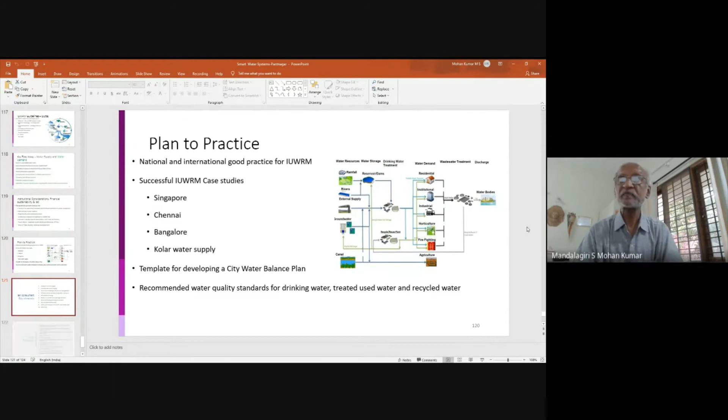Of course, people are talking about smart cities. Obviously, whenever you talk about a smart city, adequate water supply is one of the topmost agendas. Honestly, I do not know how it is listed, but I will put water as one of the key components of any smart city. And of course, energy will be there, sanitation, urban mobility, affordable housing, robust IT connectivity, good technology-based governance, sustainable environment, safety and security of citizens, education, all these things.

And honestly, one of my students has put all these things; whether it is in this order, I'm not sure. But for me as a water person, whenever you talk about a smart city, it should have a smart water supply, adequate water supply, a sustained water supply. That is the key element of any smart city.

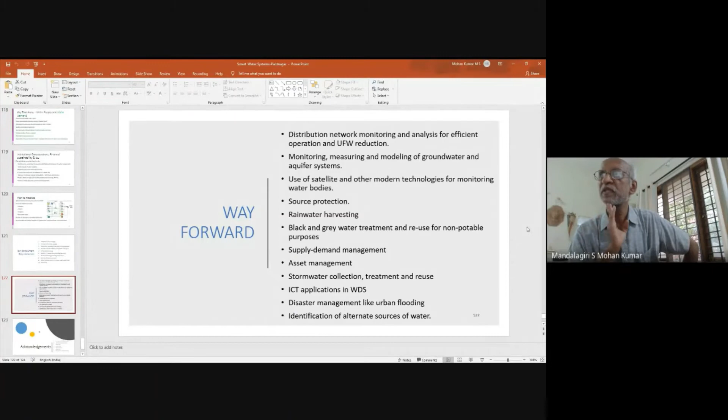And when you try to look at the way forward: distribution network monitoring and analysis for efficient water operation and loss reduction, monitoring, measuring, modeling of groundwater and aquifer systems, use of satellite and other modern technologies for monitoring water bodies, source protection, rainwater harvesting, black and grey water treatment and reuse for non-potable purposes. Supply demand management models really need to be looked into, and asset management, because we all know the assets are all getting aged.

How are you going to manage them? It's all the engineering questions. You need different models which are available to be implemented. Stormwater collection, treatment, and reuse. This is what we were talking about in the floodwater harvesting. You really need to collect it in the different water bodies and then use them after treatment. ICT application, I already mentioned to you. In all these things, you really require the ICT application.

And disaster management, like urban flooding. How are you going to handle that? All these, unless you have continuous monitoring mechanisms, models in near real time. I'm sure my colleagues would have talked to you a lot about it, how we are already doing it. Identification of alternate sources of water. For the city, unless you have plans for alternate sources in another 30 years, things like that, I think we'll fall short of doing our job.